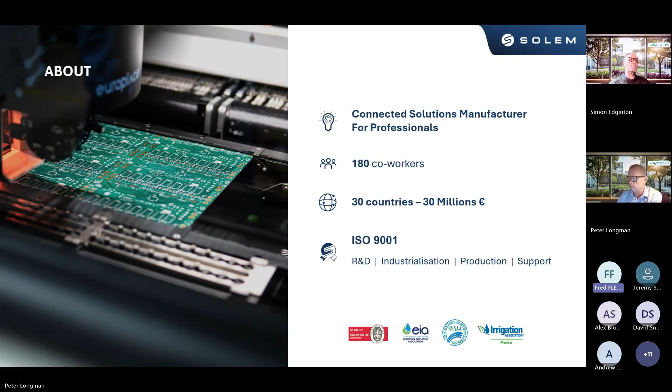Very important for all of you, and very important for Solem, we are ISO 9001 on the full process of the company, meaning from R&D through industrialization, production, and support. We are part of the Irrigation Association, and we are EIA members. Last but not least, Solem, let's say that the company, the holding company called Primal, is holding 3 brands. The first brand is called Attentive. This is telecare, healthcare business for elderly people living alone at home or in some healthcare centers.

We have developed specific products to manage and help people live in good conditions at home, and to be capable of launching alerts in case something is going wrong.

Indigo is the brand for the connected pool, so this is for pool specialists. And the last one we will go through today is Solem, connected irrigation. This is the main business which has been driven for the last 40 years. Today, just to give you an idea, Attentive and Solem represent 90% of our income.

With Solem products, we are capable of providing specific products to manage dedicated areas, such as residential watering, connected municipality - commercial side, depending on the terms you use in the UK - connected agriculture, so we have dedicated products for the ag market, and a range of products to manage what we call the connected garden, with a dedicated app to manage irrigation, pool, and lighting products.

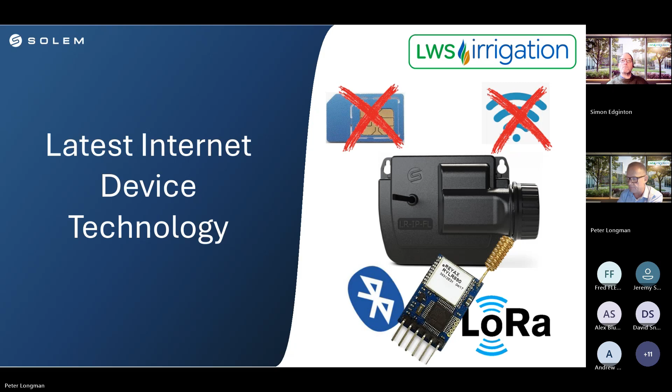So LoRa itself can look like a device like this. You build this into whatever you're making, whether it's irrigation or a panic button, and it could be at high altitude - these radio frequencies could reach up to 10 kilometers. At low altitudes, through plant rooms, it could be anywhere between 200 and 1500 meters in normal operations. These are the distances we're seeing with these devices when you put them in the ground.

Very low power - going from lithium batteries, you can use a 9-volt battery in your connected device and still cover those distances with long operating lives. This technology, and it gets a bit technical here, uses a radio technology called chirp spread spectrum modulation. It uses a wide frequency and modulates over that frequency to get very secure and robust small packets of information over long distances with low power. So I hope that explains the direction we're heading in.

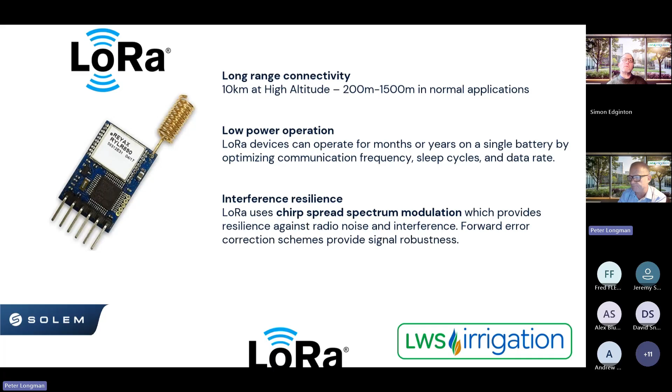And we have a solar panel version too, but also sensor modules. So not only control and irrigation, Fred's going to talk to us a little bit later on about the sensors that you can connect and what that can look like and how they can work as a group.

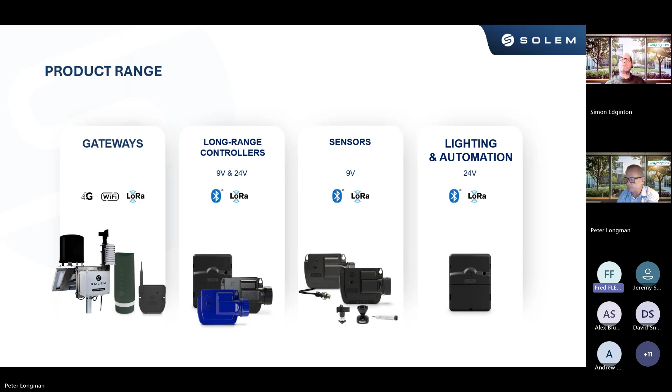For example, if you want to manage the motor of your fountain, this module, the LROL, is capable to manage at distance the motor. Next.

So each time you can see one controller or one sensor module, you are capable to design a circle, a bubble. Imagine that each time you put a gateway, 4G, Wi-Fi, it doesn't matter, you create a LoRa bubble with a radius of 800 meters.

Each time you create this bubble, you will connect up to 25 modules with a 4G gateway, up to 30 modules with a Wi-Fi gateway. As soon as your gateway is fully crowded and fully connected with all the modules, you can put another gateway in order to create another bubble and again to pair controllers, sensors, all what you need.

At the end, for your customer, you don't care about I have 1 gateway, 2 gateways, 3 gateways, 10 gateways. There is no limitation. At the end, you will be capable to aggregate all these modules inside your account, and the customer will see at the end only the number of stations, like having a big controller, and to manage all the irrigation of your city, of a big green, of a big space, or for example in a hotel or whatever. You will be capable to manage all your irrigation controllers and sensors.

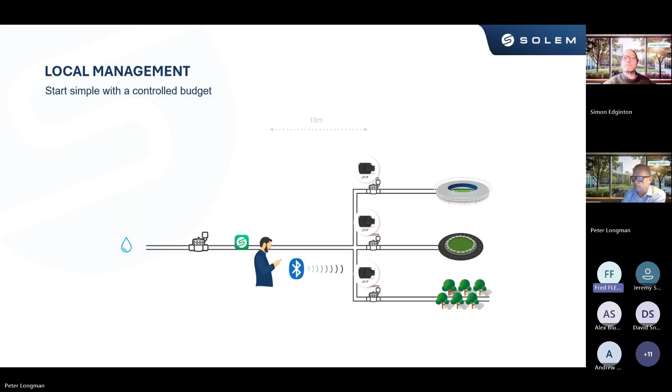Now, in a second step, your customer is familiarized with the technology, happy about the robustness and the easiness of the application. In this case, they want to move to the remote management.

No need to change the controllers. They will just evolve by adding gateways, 4G, Wi-Fi. Can you, next please? And as soon as you will connect this Wi-Fi or 4G gateway, the module will connect and will communicate under the LoRa technology directly to the cloud. So no longer need for the technicians to move in the field and to go close to the modules. Next, please.

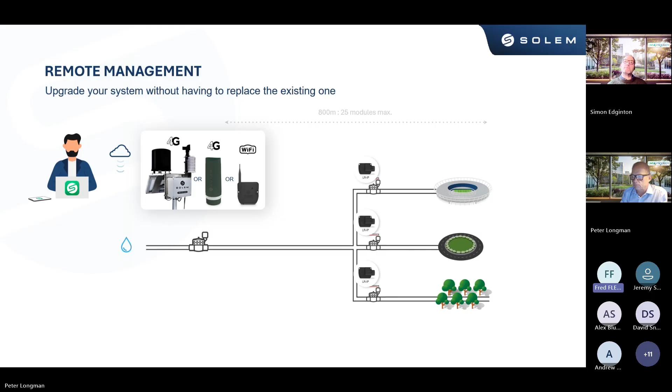The next option is what I was talking about: aggregating controllers. How do we do this? We've created a feature called cluster. With COVID-19, cluster wasn't a very sexy word, but cluster means exactly to aggregate all your modules. There's no limitation. What's very important is one main source, one main pipe means one cluster, whatever the number of controllers after that, second line, third line, subdivision.

In this simple case, we have 3 controllers and 1 station, and we're capable of this because we created a dedicated controller called LRPM, LR for LoRa technology and PM for pump management. When you connect this LRPM to the master valve or to the pump through a relay, we automatically synchronize all the irrigation schedules from the other controllers directly inside this master valve. Each time one controller decides, for example, to switch on at 6 a.m., the master valve switches on automatically at 6 a.m. and switches off at 10, without anyone taking the lead afterward.

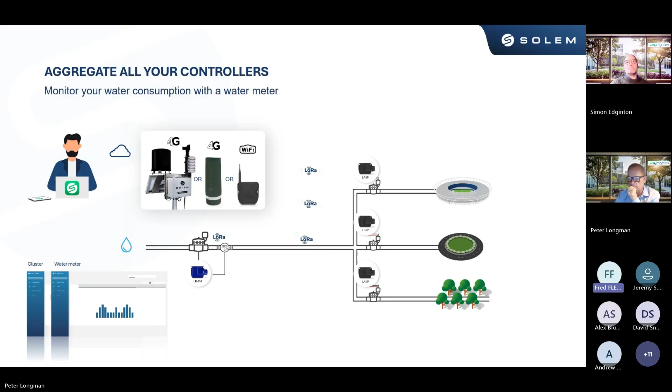How to switch to precision irrigation. The next step for your customer is to move to precision irrigation. How do you manage it?

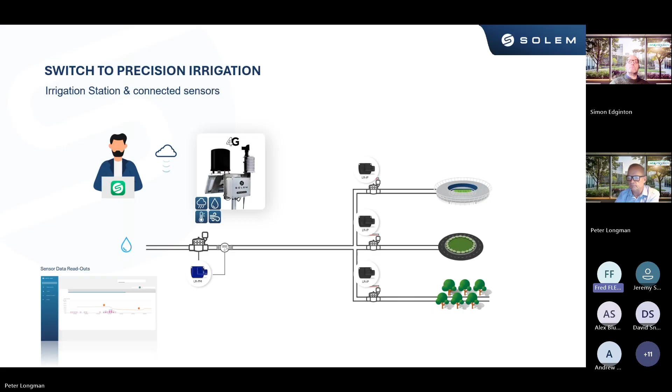Through the help of connected sensors, and our best product, the irrigation station, which is a 2-in-1 product: first a 4G gateway, plus 4 climatic sensors for rainfall, wind speed, air hygrometry, and temperature.

You can decide to place this irrigation station somewhere. Let's take an example: I am in the south of London. I will put my irrigation station there and monitor the rainfall. Probably in the north of London there's a stadium, and the pluviometry of the rainfall over there won't be equivalent to what I'd have in the south.

In this case, I will add another rain gauge or pluviometer with a specific sensor module called LRMS, module sensor, in order to have rainfall data from 2 different points in the city.

If it is raining, the system will be capable of detecting the quantity of water. The rainfall will be detected, and you'll be able to switch off your irrigation immediately for 1 day, 2 days, up to 15 days.

Now talking about roundabouts, grass, and trees, we're capable of monitoring soil moisture, either with soil moisture sensors or by monitoring the tension inside the soil. When the roots of the plants grab the water inside the soil, it creates a tension, and tensiometry is capable of monitoring this tension.

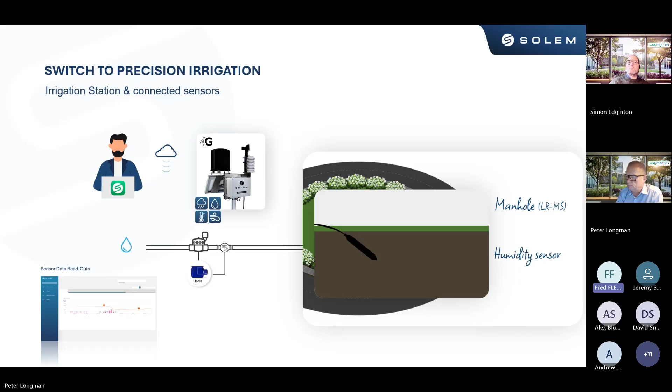As a quick example, you put your soil moisture sensor inside the valve box, and you install this soil moisture sensor very close to the roots. This soil moisture sensor will be capable of monitoring the quantity of water inside the soils and providing you data everywhere about the quantity of water.

The second point of the second option is tensiometry.

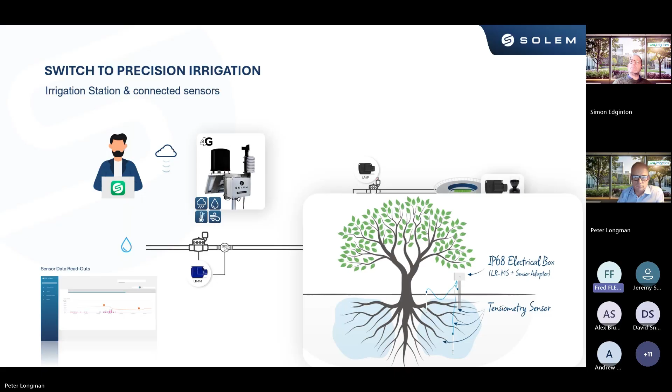If you place sensors in very dedicated areas, you can see there we have 3 sensors. By placing those tensiometers in a very dedicated area, you are capable to monitor the bubble of water around the tree and its roots. During the first 2 years of your tree, you can guarantee that its development will be done properly, in depth and width. After 2 years, you remove the sensors and place them in another area. Once installed, it's not for life—after 2 years, or even 6 months, you can decide to change. You do what you want.

Next, please. Okay, this is what I was talking about. This is an example. Next.

For the animation, okay, it is raining. I set up a maximum at 10 millimeters. The system detects the rainfall is over 10 millimeters of rain. The system will send an alert immediately to the gateway. This is an alert, goes to the cloud. The cloud will look at the rules—rules meaning over 10 millimeters, switch off the irrigation. Then we move back to the controllers to tell all the modules at a glance to switch off for 1 day, 2 days, up to 15 days.

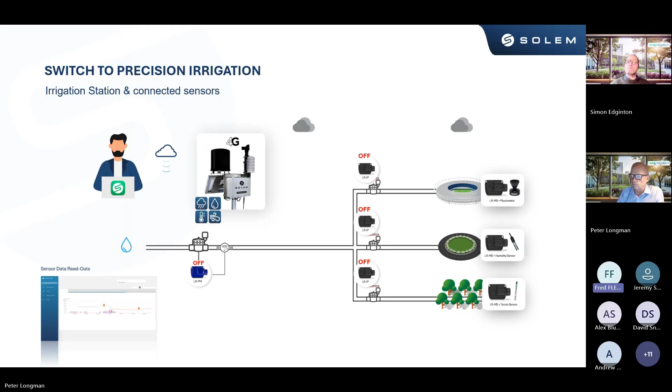So this is full automation based on sensors. The target at the end for a city is to be safe for the mayor, so he's not bothered by people complaining that he's irrigating when it is raining. But at the same time, with soil moisture and tensiometry, what is very important is saving water—very, very important. The target of those sensors is to provide the right quantity of water at the right time.

Now I'll move to the maintenance point of view. By using a dedicated controller called LRPR, LoRa pressure, you are capable to monitor the real pressure from 0 to 16 bars of your main pipe or subdivision. You can put this sensor wherever you need.

Quick example: through the ages, your tubing, your pipe is clogging. So after a while, instead of having an average pressure of 5 bars, step by step your pressure will decrease. Thanks to this monitoring, you can decide, okay, once I reach 2.5 or 3 bars, I need to clean my tubing, because after that I wouldn't have enough pressure and enough flow rate.

The second point with this pressure sensor, what is great—if you look on the left back side of the screen, you have some glitches. Each time a station or valve is opening, it's normal to have a single glitch in the graph, showing a slight drop of pressure and then moving back to the standard pressure. So just by looking at this monitoring, you know whether your irrigation installation is working well or not.

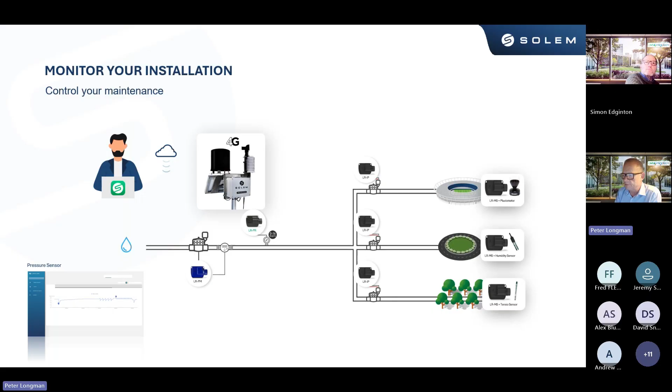As you can see, we have a dedicated platform and a dedicated app. Both the app and platform are free for your customer. This is very important compared to some of our competitors, where you have to pay. Of course, we develop the application and platform with our own dedicated team—internally we have an R&D team of globally 40 to 50 people, dedicated persons for the application, iOS and Android, dedicated persons for the platform with the computer, and dedicated persons for the electronic embedded software. Okay, let's move now to my screen.

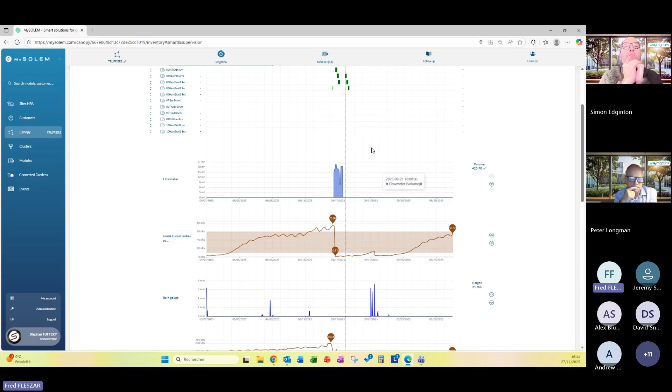Now, if I look at the curve, I see that now my ground is getting drier, drier, drier, and suddenly I see a peak back to 0. No irrigation, no flow. Maybe I have a risk of leakage. But because I have a rain gauge, no, it's not a leakage, it was raining. So thanks to this information, and only with 3 sensors - flow meter, soil moisture or tensiometry, and rain gauge - I am capable of putting the irrigation under monitoring and knowing if I have the right quantity of water or not.

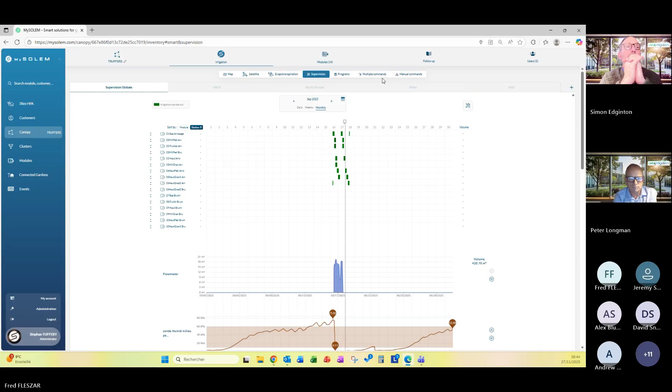You can launch multiple commands. This is what I was showing you. You can manage manual commands as well. I will move back to my own ones because I don't want to make mistakes on the customer site. So for example, if I want to launch a manual command, I can decide on this controller, and I will be capable to say I want the manual station, all stations, for 1 hour. If I confirm, it will launch a manual command and it will start immediately.

Keeping in mind that all the 9-volt battery LoRa controllers have a latency of 3 minutes. In order to save the autonomy of the battery, all our 9-volt modules wake up every 3 minutes, communicating with the gateway, asking the gateway, hey, knocking at the door, do you have a new irrigation schedule? Yes, it will grab it and save it inside the module. No new schedule, the module will move back to sleep mode. What is very important is to understand that even if you lose the 4G connection or the Wi-Fi connection, it doesn't matter, because all your scheduling is integrated and saved in each controller.

So if you don't need to change your irrigation schedule, the system reruns every day, even if you lose this cloud connection. Fred, what are your experiences of the distances that you can have between the 4G or the Wi-Fi gateway towards the sensor modules or the irrigation controllers?

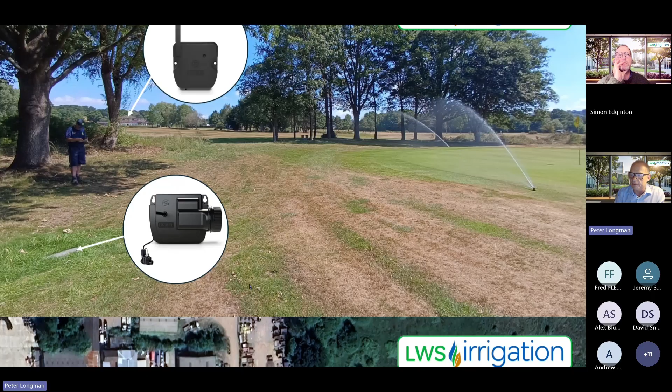And even at Abbott's, for those of you familiar with LWS, Dave Snell and I walked to the end of the field, over 300 meters away, and we ran out of field, but we were still able to operate it over the internet and open and close that valve. So we've got some experience of that.